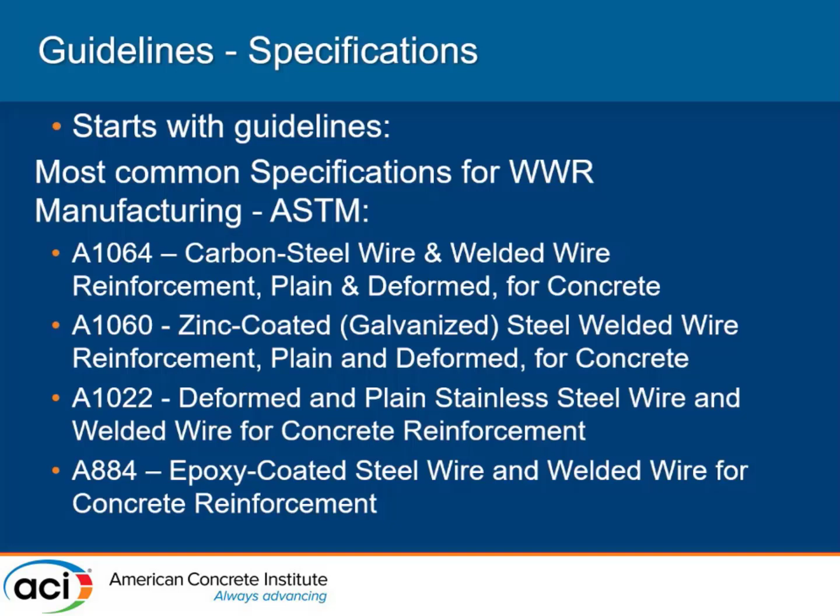So how do we get our material? We get all the raw material. Essentially, we have to recycle a lot of the steel, so we get scrap. We go through a melting process to get the chemistry we want for a particular order. And that's usually done through an electric arc furnace. And I'll have pictures of those as well.

And then we melt those in a melting pot, and we'll cast billets, which are square ingots. I'll show that as well in the next picture. And we'll roll those to a specific size that we need for the order. Now, typically we can do 1/64 interval diameters, but we usually start with a 7/32 or go up to 11/16 inch diameter wire. And if you need metric, that's a 1 millimeter increment between 5 and 18. So for those that deal with metric, I wanted to make sure we included you as well.

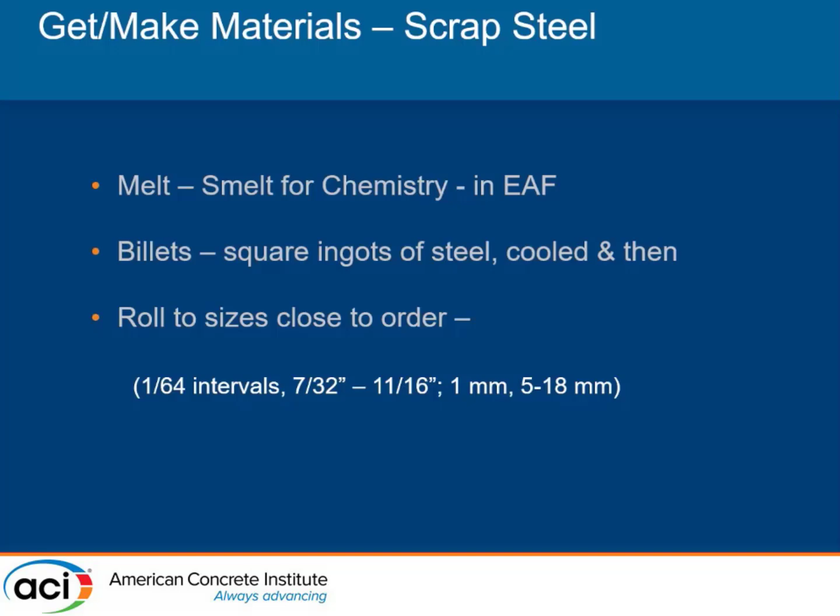And this is essentially the melting pot. It can melt about 65,000 pounds of steel, and then it pours into essentially a casting. So it casts up to 4 lines of billets, and then what we normally do is we take those billets once they've cooled and put them into a reheat oven. We'll reheat it, and then we'll draw it out to a particular diameter coil that we need. And this is in a coil bed as it's cooling coming off. Then that cools, and then we'll take that to the manufacturing point.

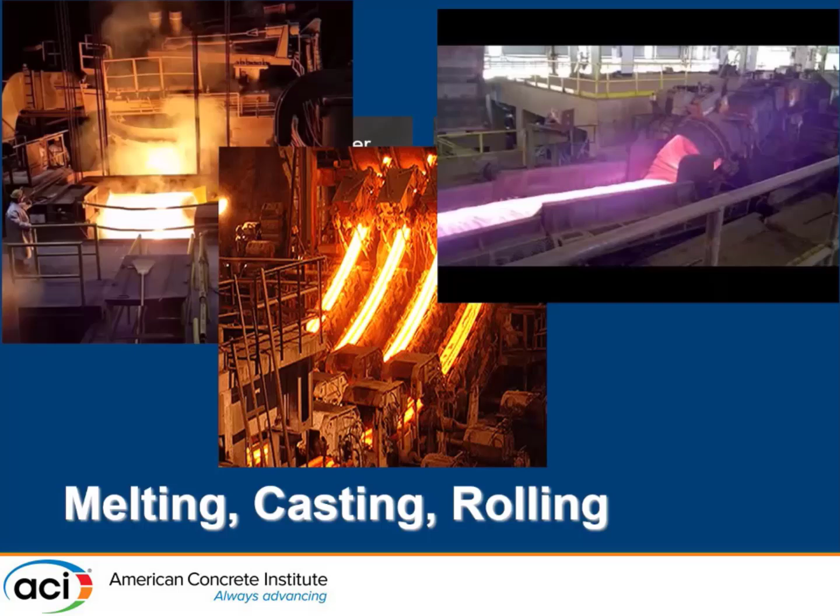So, product orders. I need to draw my wire to a particular size for a welded wire order. Now that rod that I take in a certain size, I may draw it down 20%. That's what the cold working is all about. I may draw it down up to about 20% reduction of that diameter. I'm also looking for what my strength parameters are going to be when I do that. So as Chris said, I'm just giving you a couple of different ballparks that are normal in the industry, but Chris gave you a lot more of the steel strengths you can go up to.

And then we need to choose our machine, so what we can do with that product and where it needs to be. In your order, we have different types of machines for different products, different welds, different size requirements, and different widths and lengths.

And so we need to be able to put that in production for those different machines that we have throughout our manufacturing facilities, based on the specification of what is needed for the order for the client. And so we need to be able to put that in a production schedule for that machine or a couple of machines that may be able to do it throughout our plants and industry.

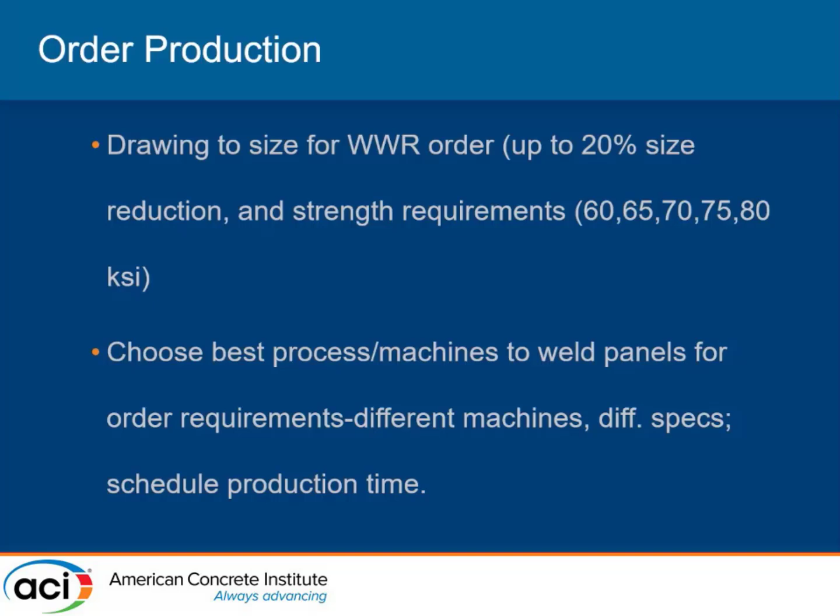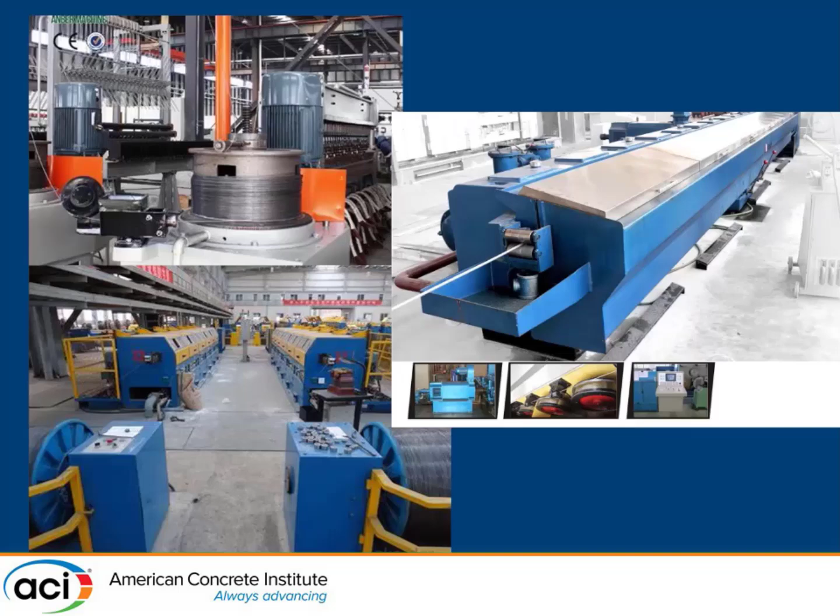And these are some of the ideas of rolling vertical or horizontal rollers. So they can come off in different ways, but they'll essentially be used in the production line, in the welding line. This is just a drawing equipment that's typically used. So you can see the size that we need in our manufacturing facility to actually make all these things work in the production order.

So that's why it takes a while, specific orders, to get the order out, because we've got to go through the melting process, we've got to go through the rolling process, then we've got to lay out all the equipment to draw it, and then to put it in front of a welder.

Some limitations in our manufacturing is essentially just the size of the machines, the size that the machines can handle in terms of diameter, in terms of width and length, and in terms of weight. The other things that we have are job specific. When we're delivering it to a site, how much can you handle? What's the weight that you can handle on site? What's the weight you can offload? So there's offloading and site requirement handling things.

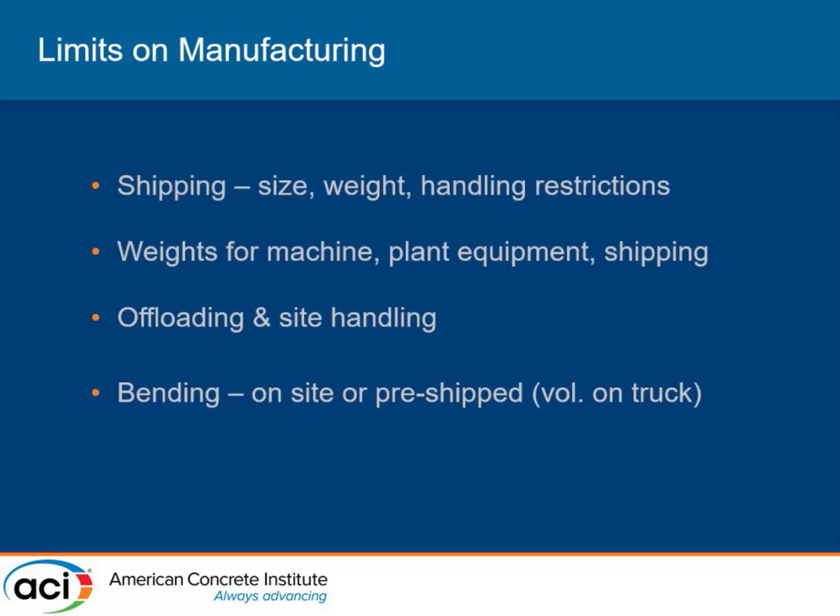Also, if you have a product that's bent, are we going to bend it on site and send the bender with the product, or are we going to pre-ship it bent? And that adds to a volume that might actually reduce the weight. And so you have issues with bending and pre-shipping or pre-ordering it bent or bending it on site. And there may be some other constraints too throughout the specifications per job. So we have to order it and figure it out per job, how we're going to get it there, what we're going to do with it on the job.

I want to go over this slide too, because in North America, essentially, it's a little different sometimes than the rest of the world. Some of the other speakers may not fully agree with this slide, but I wanted to throw it in here just because in North America, we often make orders to specific requirements, and so a lot of times you have individual federal, state requirements, county guidelines, and I think sometimes it's a little different than the rest of the world in terms of a government, or the whole nation specifying. It's easier to specify a certain product for a specific area. The other thing that's different about North America is we use imperial, and then there's metric, and so I don't think I need to speak anymore on that topic.

And then there's measuring methods and differences. In North America, oftentimes you design to a particular bar size, to a particular space, and then oftentimes we in our manufacturing convert that wire to an area and then produce that in terms of what we can make, like I said, with size, diameter, and spacing on our patterns for our machines. That'll work the best. It's made essentially to an area of steel.

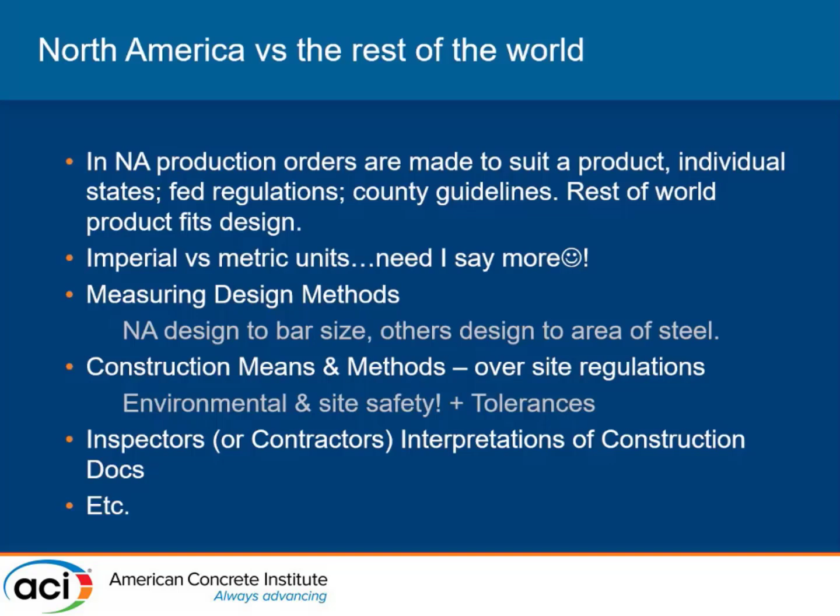In conclusion, I believe welded wire product is made like no other because we have a welded product that no other manufacturers worldwide make, and that weld is stronger than the actual individual wires. And so it gives what I consider, especially for finite element analysis, an alternate load path.

But the issue with our industry is we don't get credit for that weld having an impact, so we can't really calculate that weld as an advantage for our product. It's not allowed because of what we've done with the wire in the manufacturing process. We've taken out a lot of that elongation, with the 20%, by stretching it before we put it in production, so we get a little bit of reduction in the elongation of our wire, and I think that's part of the reason why the industry is still not giving us credit for that weld intersection.

Again, our sheets are made to order. It's a specific size, specific area, specifics. And all those specifics change from state to state, often region to region, depending on who's overseeing the project and the jurisdiction involved. So we need to be looking at all those specifications and extra requirements beyond the specifications that that industry or that region and jurisdiction might put on our product for a particular application.

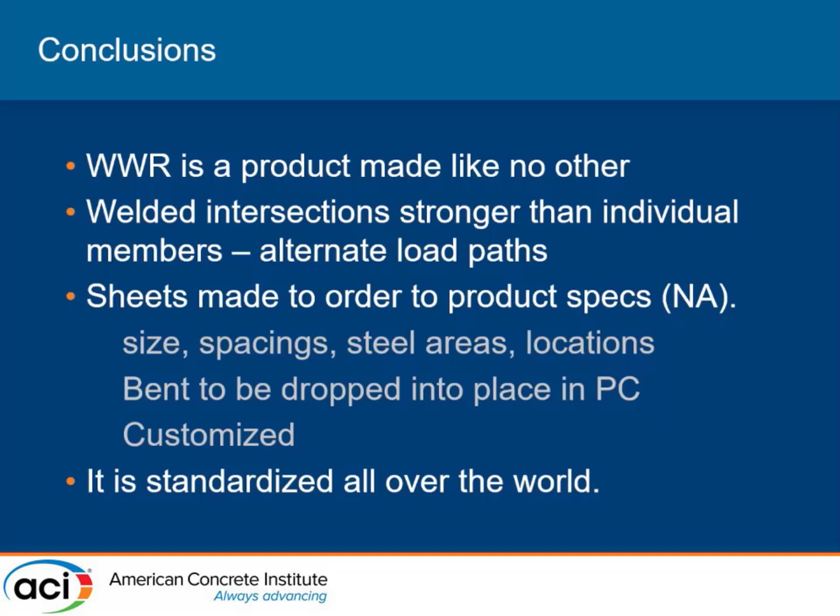But again, the thing I always like to note is it's a product that's standardized worldwide, and it's used worldwide, and it's been used throughout history to continue to speed up the means of construction and quicken the use of the end product and get it into market a lot faster, whether it's a precast, a slab on grade, or a full building mock-up. And that's my talk in a nutshell.